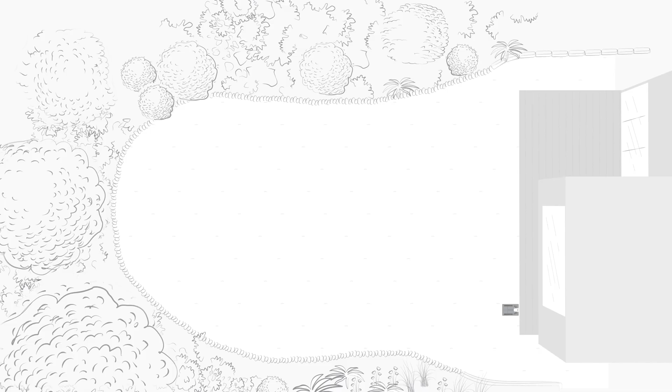The iMOW robotic mower cuts the lawn in random path patterns and recognizes fixed obstacles in the mowing area using ultrasound sensors and a bump sensor. As soon as a fixed obstacle is detected, the device slows down, bumps against the obstacle, and then continues to move in a different direction. To define the borders of the mowing area, a wire is installed around the perimeter.

No-go areas or obstacles such as flower beds or play equipment can be excluded from the mowing area with the help of the perimeter wire. When the iMOW reaches the boundary of the mowing area, it slows down and then continues to move in a different direction. The robotic mower can be operated and configured at any time with the My iMOW app. You can also use the keys of the control panel.

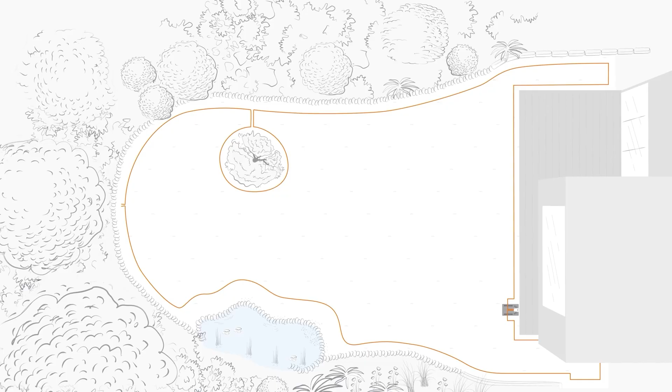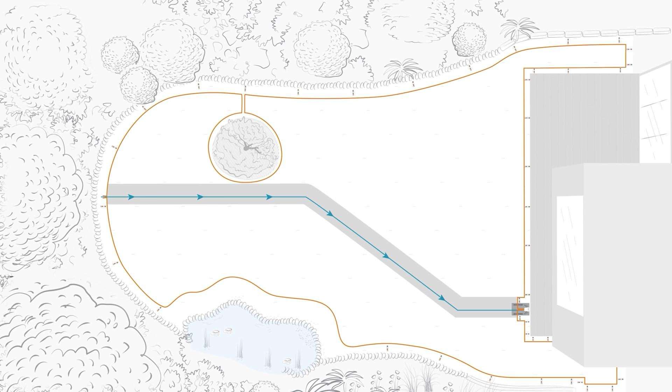In addition to the perimeter wire, a guide wire must also be laid during installation. This helps the robotic mower to find the direct route to the docking station if the mowing operation is cancelled or the battery needs to be recharged. The guide wire must be routed from the docking station for 2 meters in a straight line and at a right angle. Also ensure that the mowing area is level and free from obstacles in the direction of travel towards the docking station along the guide wire, 1.2 meters on the left side and 1 length of the iMOW ruler on the right side.

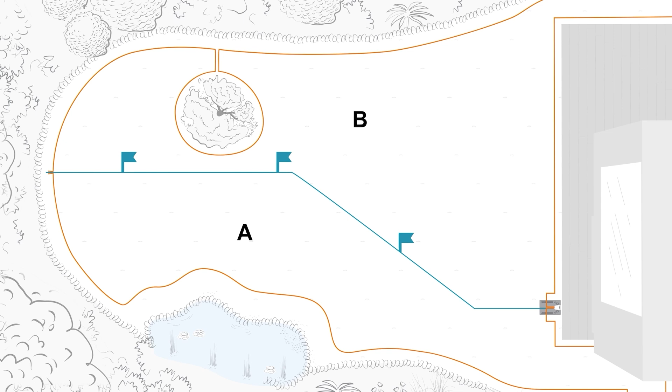You can set up to 3 starting points on a guide wire, allowing the iMOW to travel quickly to different areas of the lawn to mow. You can also use the guide wire to divide the mowing area into several zones. For example, Zone A and Zone B can be approached separately according to your mowing plan. Please note that at least 1 guide wire must always be installed.

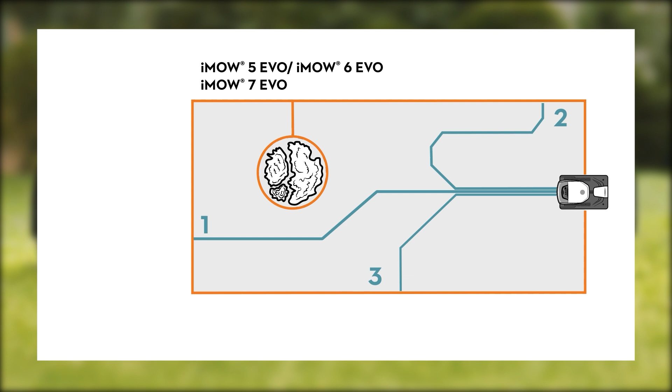If you own an iMOW 3 or 4, you can only install 1 guide wire. If you own an iMOW 5, 6, 7 or an iMOW EVO 3 or 4, up to 2 guide wires can be installed. With EVO models 5, 6, and 7, this increases to a maximum of 3 guide wires. Guide wires also make it possible to guide the iMOW through confined areas, where the minimum distance between the perimeter wires of 2 meters cannot be achieved.

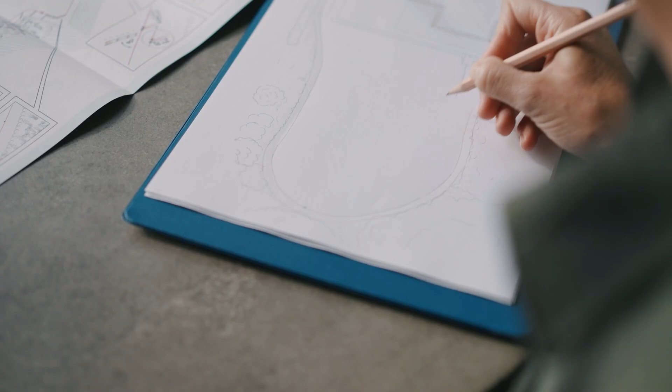Before installing the iMOW, you should draw a sketch of the garden and measure any confined areas to ensure the required clearances can be met. Mark the routing of the perimeter and guide wires too, as well as the position of the docking station. There are different options to place the docking station, which you can select individually according to your garden.

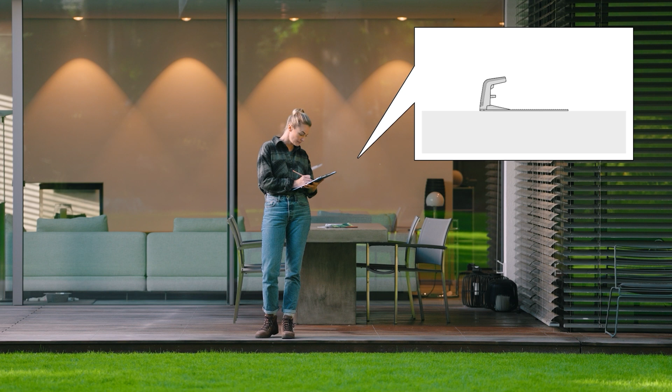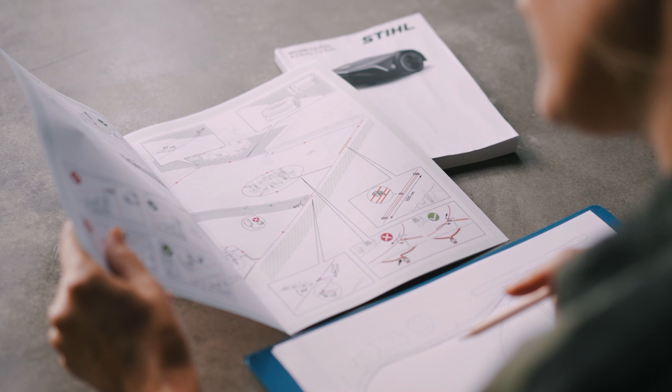The docking station should be placed on a level surface and its opening should face forward toward the mowing area. It may neither be bent, nor may it be inclined forward, to the rear or to the side. The ideal spot is a shady area, protected against the weather, with Wi-Fi reception and close to a wall socket. As a final step, give your sketch one last check, ensuring that all the requirements listed in the quick guide or user manual have been met. Once that's completed, you can then install your iMOW robotic mower.